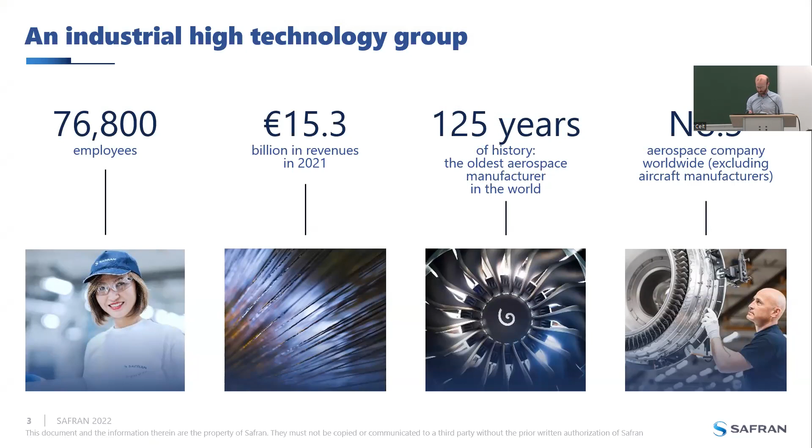In terms of presence in the world, we are present everywhere, but particularly in France, where we have half of our employees. We are also in Europe, Asia, Africa, and America. We are everywhere in the world.

In terms of research, Safran spends about 10% of revenue approximately, and in this R&D part, 75% is for environmental impact of aircraft. We have about 12,000 people working only on R&D in Safran.

We are present in all aspects of aeronautics, in propulsion, particularly in landing systems, and for today, more interesting is electrical systems. We also have activity in space, particularly for propulsion of satellites and space optics, and in defense, particularly in navigation and guidance and optronics. These are the two big specialties of Safran.

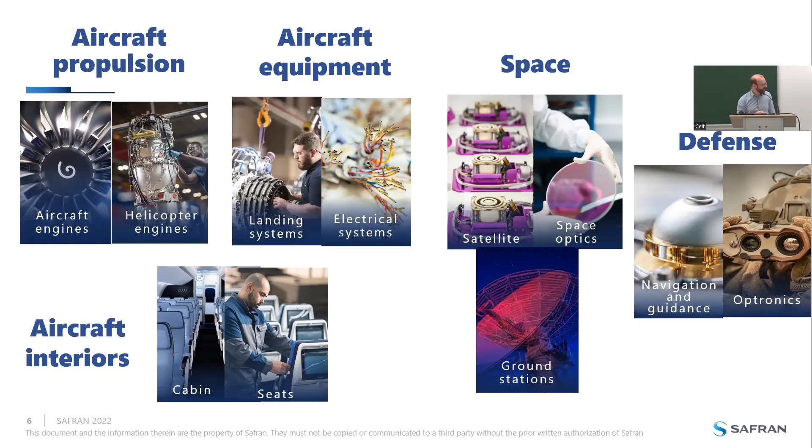Inside Safran, we have different societies. We are in Safran Electronic and Defense, which has 9,000 employees. We have different specialties inside Safran Electronics and Defense — electronics and defense, of course. 50% of our activity is for military projects and 50% for civil aircraft, particularly for all electronics in aircraft.

I work on the service for the actuator. In terms of actuators, we produce different kinds. We have some actuators for the cabin, for the seat, particularly for the business seats inside of aircraft. You also have the ETRAS, which is for braking the aircraft with a thrust reverser.

You have a secondary flight control — for example the horizontal stabilizer actuator, THSA. Also, we have some actuators for the primary control, which is more of a prototype for the moment, not yet a reality inside of aircraft. And then we have many actuators inside of the cockpit, particularly throttles, but also stick units.

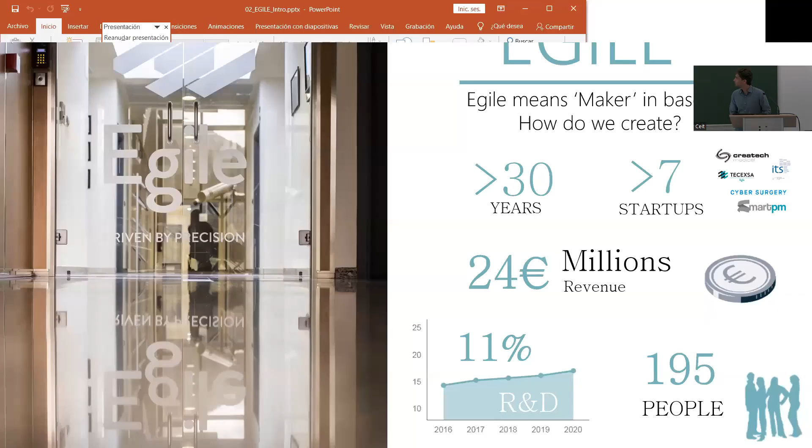We are an industrial and technological group which provides special services and products in the field of high precision mechanics. We are located in the north of Spain, between San Sebastian and Bilbao.

Some numbers about the company: we have more than 30 years of experience in the field of mechanical components, and there have been more than 7 startups born from Egile Mechanics R&D projects. We had revenue in 2021 of almost 24 million, and we invest about 11% in R&D projects. We are almost 200 people, and just as a curiosity, Egile in the local Basque language means maker, or who makes.

We are divided into 4 different divisions. Two of them are related to the aeronautical sector. The first one is Egile Aerotransmission System, which is a manufacturer of different components for airplanes and helicopters. Also in the aeronautical sector is Egile Aero Engines, which is specialized in the manufacturing of different components for airplane engines.

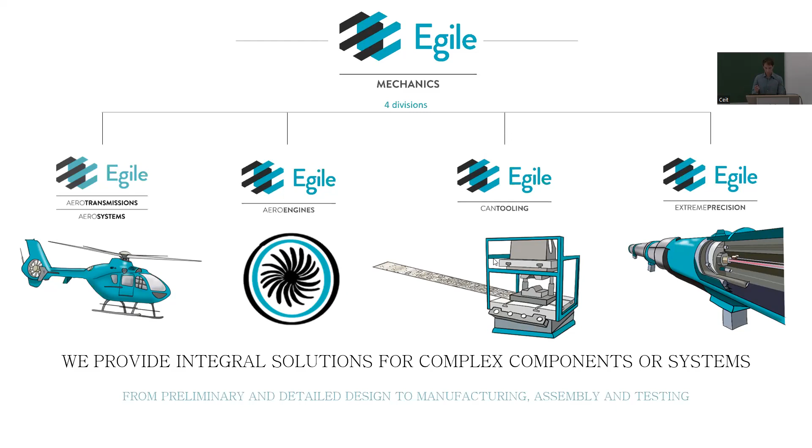Just a little bit of history. As I told you, we started 30 years ago manufacturing components for the SPPS project. We started with small batches, spare parts and prototypes. And over the years we gained access to new platforms and new systems.

So currently we are manufacturers of many components involved mainly in Safran helicopter engines, but also we work for Airbus and other big players of the industry. Currently, we are working on diversification, internationalization, and vertical integration of the processes needed for the manufacturing of our products.

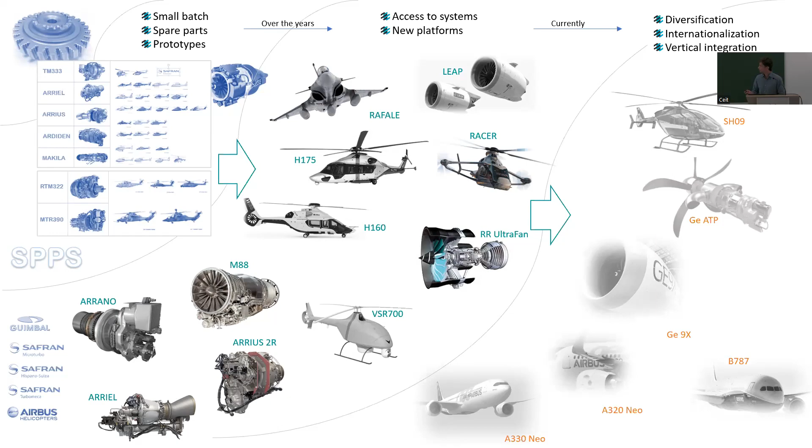As you see, we are involved in many programs for airplanes from Airbus and Boeing. And here are just some examples of those boxes that we provide with all the components for the landing gear.

The division of Egile Aero Engines is focused on the manufacturing of NGVs, nozzle guide vanes, and airfoils. However, we also have some projects where we manufacture other components of the engines, such as main shaft, transmission components, lubrication system components, and so on. So also in this area, our parts are located in many plane and helicopter programs.

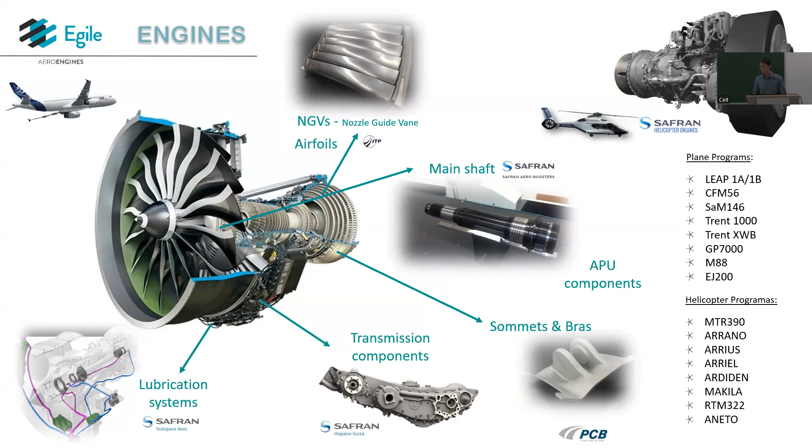As I told, one of the lines we are focusing on right now is vertical integration in order to provide our components with the whole system done in-house. So we already have the NADCAP certification for carburizing and nitriding, and for sure also for other heat treatments such as quenching, tempering, and so on.

In order to provide the whole process in-house, we have also integrated special quality processes needed for the certification of quality of the components, such as magnetic particle inspection, liquid penetrant testing, Barkhausen noise, and so on. We have a new facility in Itziar, where there are more than 6,000 square meters of open workshop.

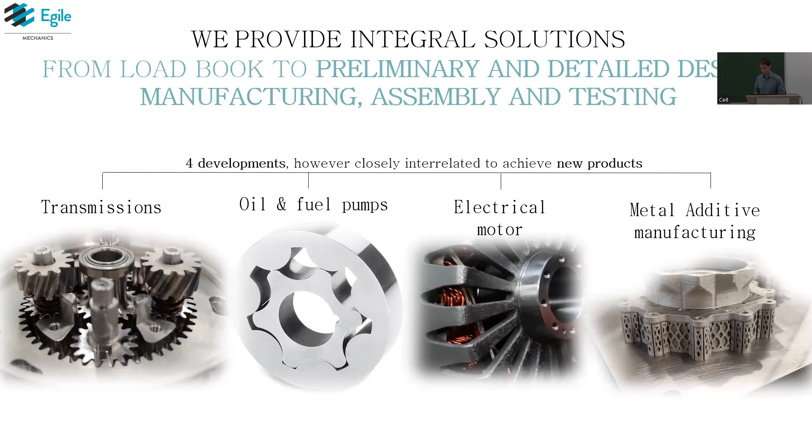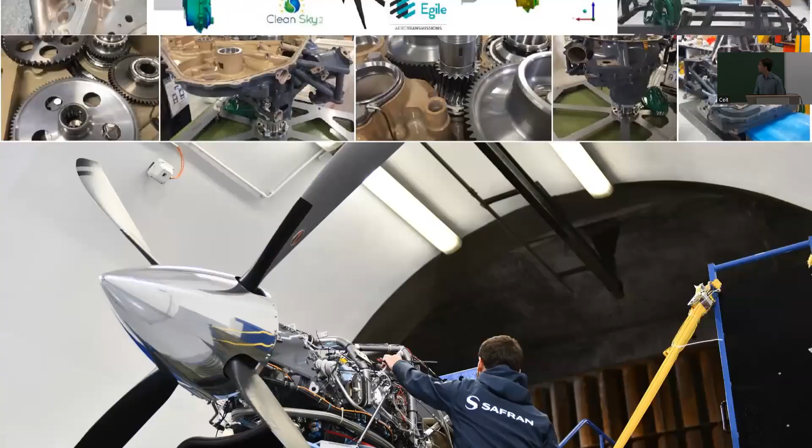Just to finish, some slides with finished projects. This is an example of a Clean Sky 2 project that we performed with the collaboration of Safran Helicopter Engines and Safran Transmission Systems, where we co-designed with them the gearbox of the TEC-TP project. We also manufactured the components and the assembly, and they have been testing them in the facilities in Tarnos.

Here's another example, also for Safran, where we designed a very high speed double epicyclic gearbox. We did the calculation, design, and the assembly, and it has been testing in 2021.

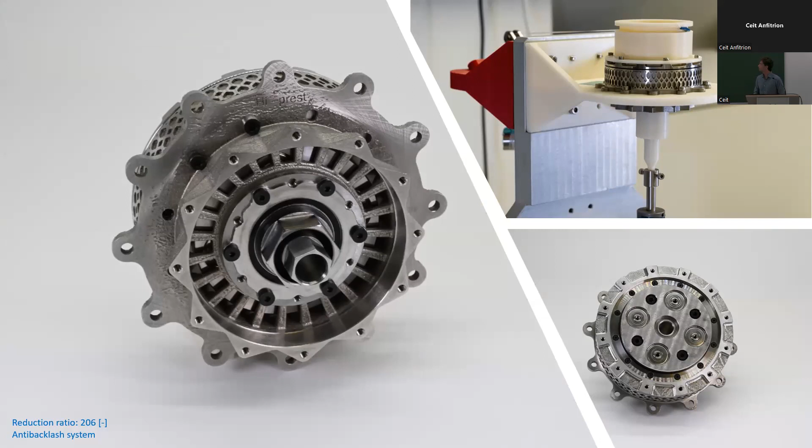achieve the specification of the client. And, as I said, we are also providing different solutions for the lubrication of airplanes.

We are designers of gerotors and gear pumps. It's another example where additive manufacturing might introduce some benefits, at least at this moment, for some prototypes that we have been performing during this year.

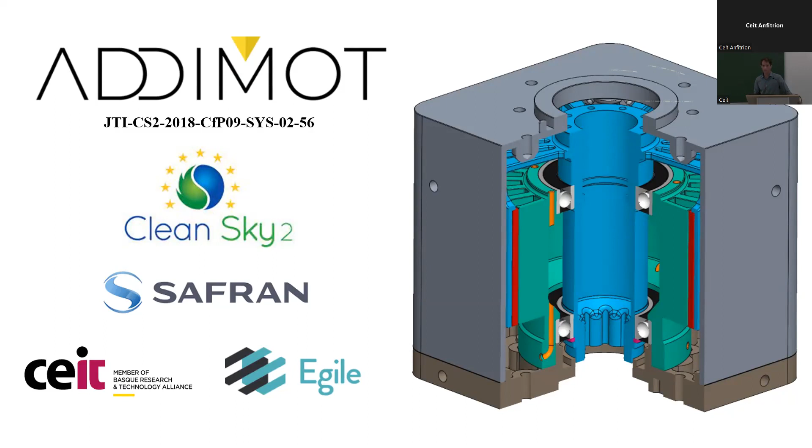And that's all. Now I'm going to let my colleagues start with the aim of this workshop, which is the Addimot project. That was a Clean Sky 2 project with Safran as topic leader, and we worked with Ceit in the development of this electrical motor.

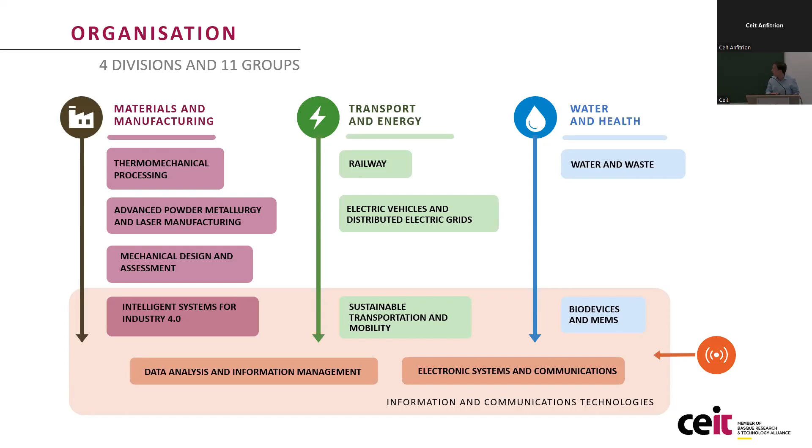Finally, talking about the aeronautics sector, we have been very active in recent years in several activities: modeling and characterization of materials and manufacturing processes, with huge experience of nearly 40 years at the center, with some clients.

And finally, just some clients that we have in this sector. We work with major actors: ITP Aero, Airbus, Leonardo, and also Safran, and other clients we work with in this sector, of course, with our colleagues of Egile Mechanics.

Okay, and that's my brief presentation of Ceit and our work in the aeronautics sector. Now I'm giving the floor again to Blaise, just to give us the context and the objectives of this Addimot project. And now we begin with the technical session. Okay, Blaise, please.

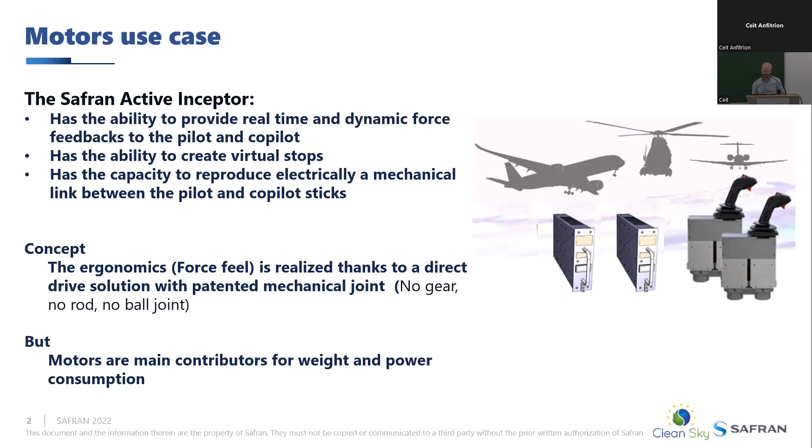It's for that reason we have chosen this motor for the Addimot project. If I focus on the motor, the functional envelope is 100 by 100 by 100 millimeters. If it's smaller, it's better, but that's the space we have for the moment.

The level of torque is around 10 Newton meters, and it never does one full turn, just 70 by 70 degrees.

The most important thing for this motor is also the quality of the torque, because you have a sensation, and the sensor of the human hand is very sensitive. For this reason we want to have no cogging torque in this motor, or very little. The ripples need to be minimized, and the friction also needs to be very small.

Also, the last aspect is consumption, because you are in an aircraft, and the level of consumption needs to be very low. Imagine the motor has no movement for a large part of the time, so it has no power—you only have losses inside this motor.

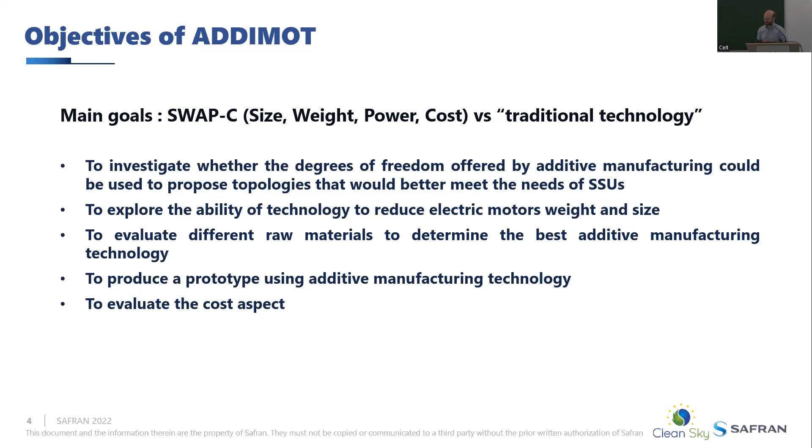Thank you very much, Blaise, for giving us the context and the objectives of the Addimot project. It is the use of additive manufacturing for electric motor components. We're going to begin with the production of the powder needed, the raw material for magnetic and structural components. José Manuel Martín and Miren Aristizabal are going to introduce this aspect, not only the Addimot results, but also an overview about magnetic materials for additive manufacturing.

Good morning, everyone. My name is José Manuel Martín García, and I will do this presentation with my colleague Miren Aristizabal. I will do a general introduction about additive manufacturing of magnetic materials, and in particular the process of selection of the materials for this project. Later, Miren will present the technical results in more detail.

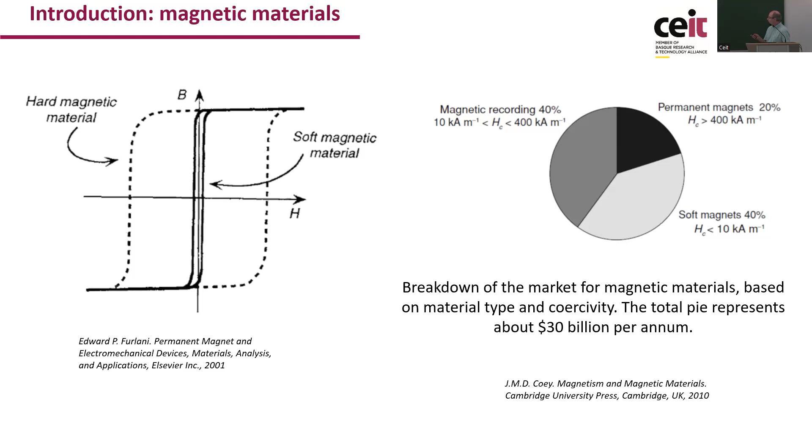Two other important properties of hard magnetic materials are the coercivity, this point here, the maximum H field that the material is able to withstand in operation, and secondly the remanence, the B field at this point, which is related to the maximum torque that the motor can deliver.

In the case of soft magnetic materials, the main characteristic they must exhibit in application is that they are easy to magnetize and demagnetize, consuming very low energy. To do so, as mentioned before, the curve must be very narrow, meaning they must have a very low coercivity. If possible, the permeability must be as high as possible, because this is related to the velocity at which the material can respond during magnetization and demagnetization.

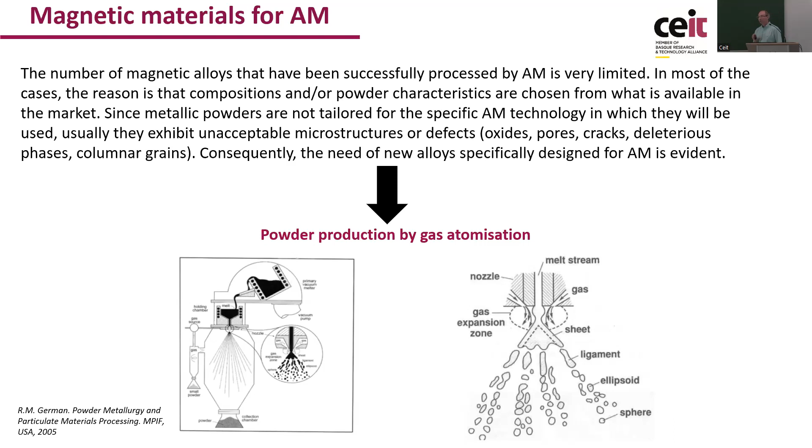At Ceit, we have two facilities to produce gas atomized powder. The first is a small atomizer, large scale, where we are able to produce 3 kilograms of powder per experiment. We also have a big atomizer where we can produce 200 kilograms of powder per experiment.

In the process, basically what we do is charge the raw materials into an induction melting furnace. Here we melt the materials and they get alloyed with the different alloying elements. When the melt is homogeneous, we lift up the rod, called the stopper rod, and the metal is driven into the atomization chamber.

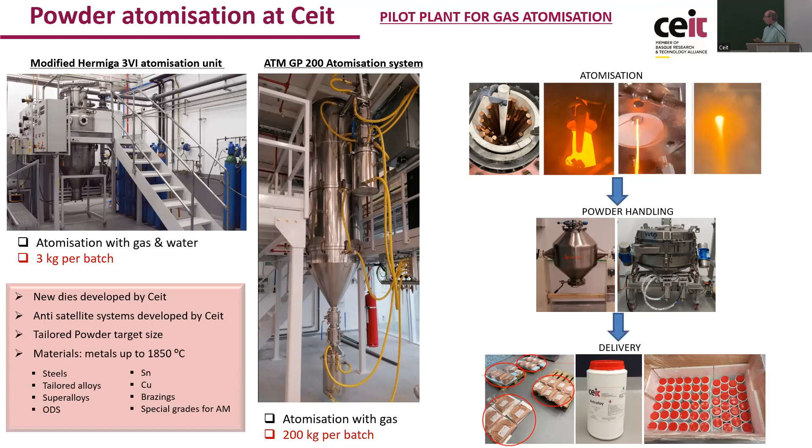When the metal arrives at the atomization chamber, we turn on a supersonic gas flow and impinge this metal flow, breaking it into particles. That's how we produce the powder. Later, the powder can be mixed with other additives using mixers, or sieved to separate the size fraction of interest, like in this project. Finally, the powder is packed to transfer to further processing.

Regarding the hard magnetic materials, the material of choice was neodymium iron boron. We were able to atomize this material to produce powder, but finally it was discarded for processing by additive manufacturing.

There are two reasons for that. The first one is the microstructure of the powder material. If you process by additive manufacturing, you melt this powder and it solidifies, so the microstructure is going to be different, but it will exhibit some main characteristics that are equivalent. There is always some residual alpha iron, which is a soft magnetic phase, and this causes the coercivity of the material to be narrow. Probably this could be corrected by applying an annealing treatment after additive manufacturing processing.

The second problem is that the powder is isotropic, and the selective laser melting magnets produced from it will also be isotropic. That means the maximum remanence we can achieve is about 0.5 to 0.6 Tesla, which compared with an anisotropic sintered magnet, with remanence of 1.3 to 1.4 Tesla, is quite low. If the remanence is very low, you have to make your motor bigger, which was not possible in this case.

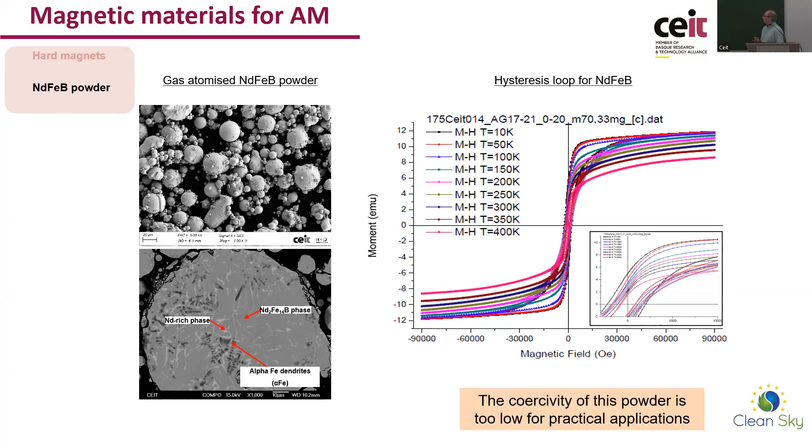So finally, we have not made a magnet by additive manufacturing in this project, and the magnets used are anisotropic sintered magnets that have been bought. Regarding the soft magnetic material, we have considered three possibilities: supermalloy, permandur, and an iron silicon alloy.

Supermalloy is an alloy with very, very low coercivity. It's the material with the highest permeability, but the point is that it has a saturation magnetization that is quite low, about 0.5 Tesla, which again means you have to make your motor design bigger. So it was discarded for this reason.

Iron silicon is quite convenient because it's a cheap material. It has a saturation magnetization around 1.7 Tesla, which is high enough, and the coercivity is also quite low. We did some builds with iron silicon, but the silicon content is quite high, which reduces the ductility of the material. During selective laser melting, there are quite significant thermal stresses, and the material was brittle - we could not easily avoid the formation of cracks during deposition. So finally it was discarded as well.

Finally, the material we worked with is permandur. Its main characteristic is that the saturation magnetization is very high, about 2.4 Tesla, which allows you to minimize and reduce the size of the motor. So it was a good choice. The coercivity is also a little bit high compared with the other materials, but this is especially important when the frequency of the motor's operation is high, and I think this was not the case. So let's say the hysteresis loss was acceptable in this project.

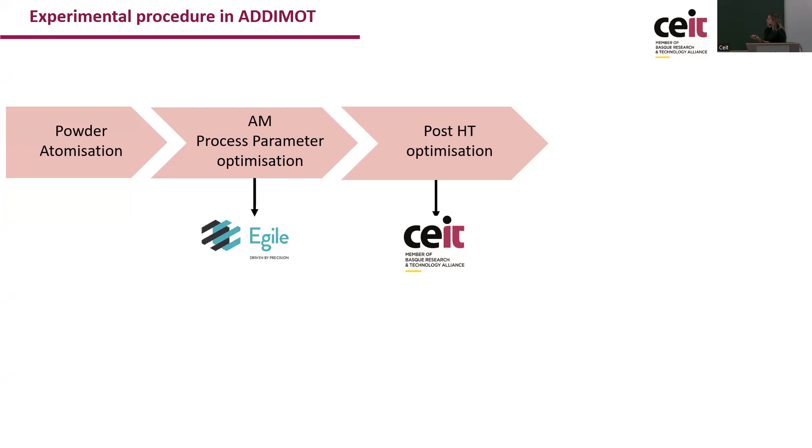Okay, so as Jose Manuel said, we finally chose this soft magnetic material, permandur. With this material at Egile Mechanics, what they did was a process parameter optimization - this talk will be given later by Egile Mechanics. Once we obtained the material with proper characteristics, what we did at Ceit was a post-heat treatment optimization. The experimental work we performed at Ceit involved applying several heat treatments, and in order to choose the best one, we related which microstructure we were obtaining to how this microstructure related to magnetic properties and mechanical properties.

Talking about permandur material, the composition is iron, cobalt, and 2% vanadium. We can follow the typical binary phase diagram that you can observe on the screen.

The studied conditions were first the laser powder bed fusion, or as-LPBF material, which is melted by laser and then rapidly cooled. The other conditions were after heat treatment, both after HIP (hot isostatic pressing) and after conventional heat treatment. All the heat treatments were done in this disordered alpha iron region, and the difference was the different cooling rates and holding times.

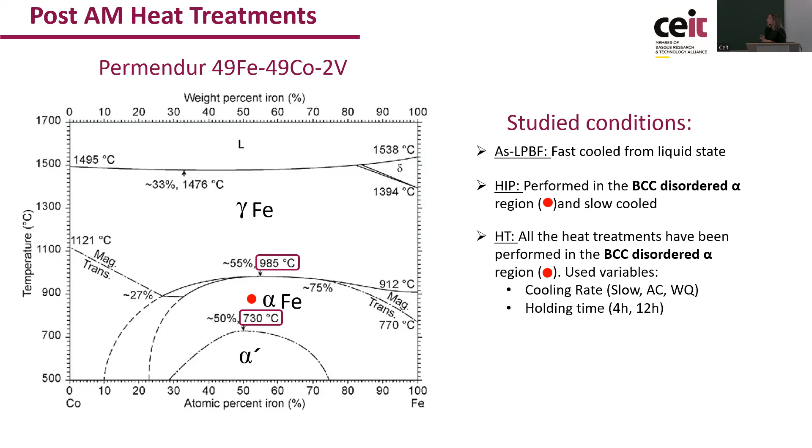Starting from the base material, the as-AM or as-laser powder bed fusion material, this has very fine grains related to the very fast cooling rate during the process. What we observe in X-ray diffraction experiments, which I'll show later, is that this phase was reached in a disordered alpha phase, the one here in this region. This phase has good mechanical properties, but the problem is that it has very poor magnetic properties.

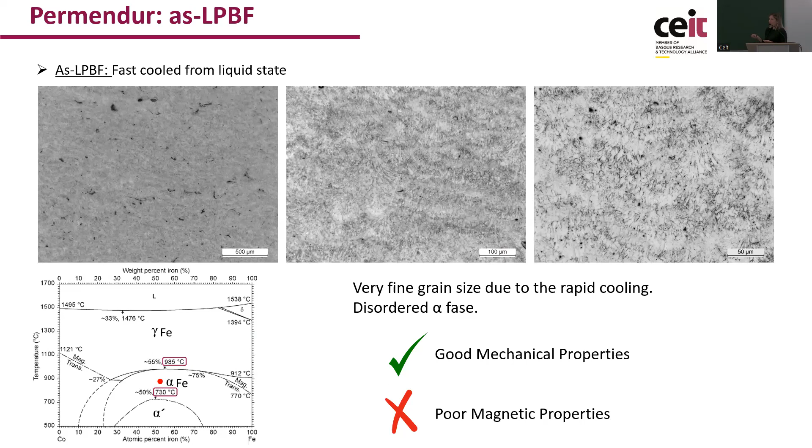As this material is supposed to be used for magnetic applications, we needed to change it. For that, the heat treatments are very useful. The standard heat treatment considers making a treatment at these temperatures with a holding time and then slowly cooling.

So when changing from disorder to order, what we obtain is very good magnetic properties, which is what we were looking for. But on the contrary, we again lose the mechanical properties, and the material becomes very brittle and difficult to handle.

Another thing I wanted to say is that both in hot isostatic pressing and conventional heat treatment, if we do the same thermal cycle with slow cooling, the resulting microstructure and properties are the same. So from now on, we focused just on conventional heat treatments, also because the material from SLM was already quite dense, so there was no need to close porosity by hot isostatic pressing.

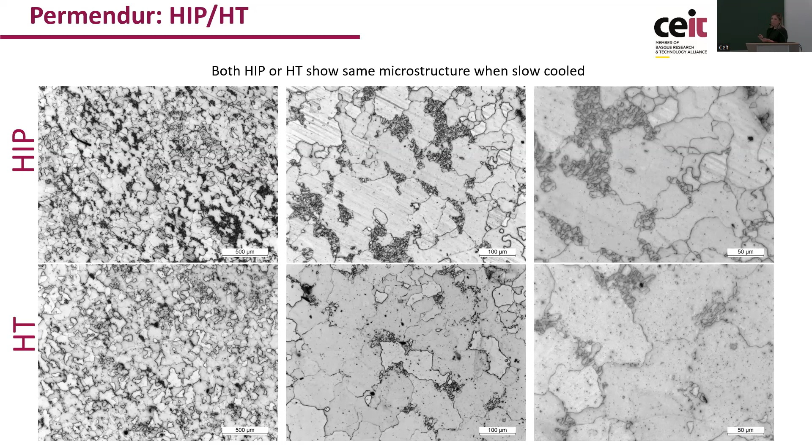The objective was to try to achieve these magnetic properties without losing all the mechanical properties. So the study we did was to try to change the cooling rate and see how the microstructure was developing, and how this was helping to increase or reduce the properties.

There were three cooling rates: the slow one that we already saw with the big alpha prime grains, then one intermediate called air cooling, and the fast water quench cooling rate.

In the case of the water quench cooling rate, again we observe a lot of small grains related to alpha grains. And again, as in the material coming from AM, we have good mechanical properties, but again the magnetic properties were low. So it's clear that if we increase one property, the other decreases.

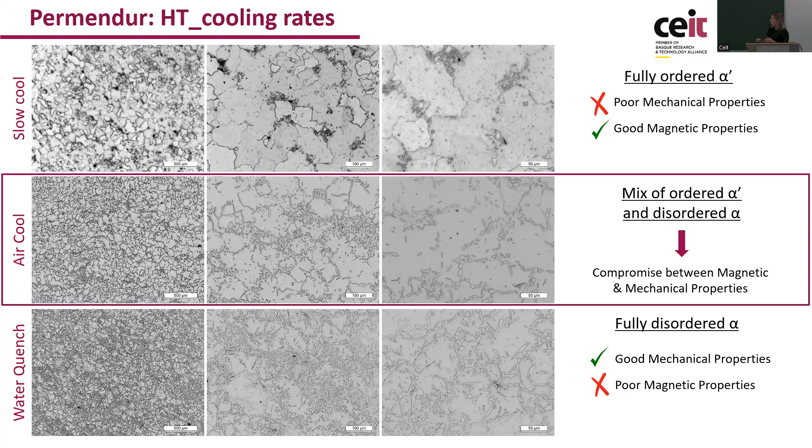So finally, what we saw is that we have to achieve a compromise with an intermediate cooling rate, which gives us a microstructure with a mixed alpha prime phase and alpha phase.

In addition, we did another study in parallel where we were changing the holding times. Here, what we wanted to obtain was whether increasing the size of the alpha grains and reducing the amount of grain boundaries would also increase the magnetic properties without reducing the mechanical properties. Although the difference isn't very large, it works, but the intermediate cooling rate is still needed.

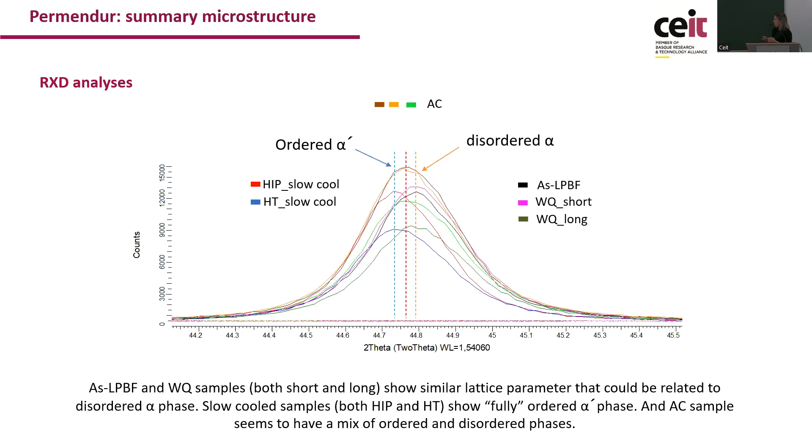So they have very low coercivity, but high permeability and high magnetization saturation. And these were related with the ones slow cooled, so heat treated and then slow cooled. And the worst soft magnetic properties were for the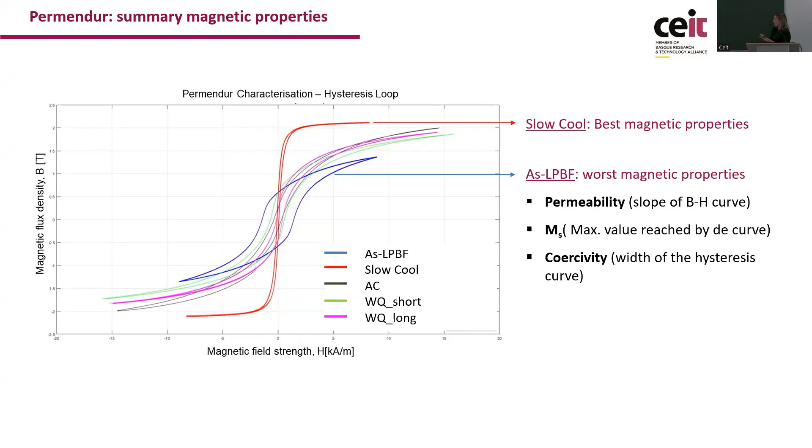AM microstructure, and in the middle, as we say, the ones that has been heat treated with different cooling rates. So conclusion, if we have a material that has been fast cooled from AM or after heat treatment, we are going to obtain a material that has a disordered alpha microstructure, which has very good mechanical properties, both in strength and in elongation. As a sample, you can see here a fracture surface of a very ductile material, but that

has very poor soft magnetic properties. On the other side, if we do a very slow cooling rate, we have a material that has ordered alpha prime microstructure with very good soft magnetic properties, but we lose completely the mechanical properties.

So for the Addimot project, what we needed and was finally the optimized conditions were the ones that were intermediately cooled, so with air cooling, where we obtained a mixture of microstructure and gave us enough magnetic properties for the application and also enough mechanical properties for machining and also for the application itself.

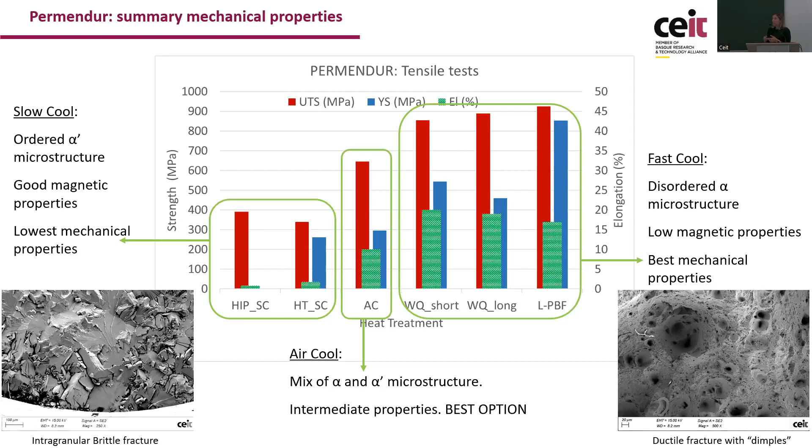So, as conclusion, as Jose Manuel said, the gas atomization process is a good alternative to manufacture soft magnetic and hard magnetic materials for additive manufacturing, because we have this feasibility of tuning the powders for the application.

And also, it's important to know that there is a high interest in magnetic materials for AM, but that still in the literature, there are not a lot of successful attempts. So there is a need for researching these materials in AM.

In our case, in the Addimot project, we have been able to manufacture a soft magnetic material and then process it by SLM or laser powder bed fusion with optimized parameters. Then thanks to the heat treatment optimization, we have been able to tune the microstructure of this material, achieving both magnetic and mechanical properties. So the final component was able to be applied with even structural properties. And thus we can say that this project has been successful in terms of this material optimization.

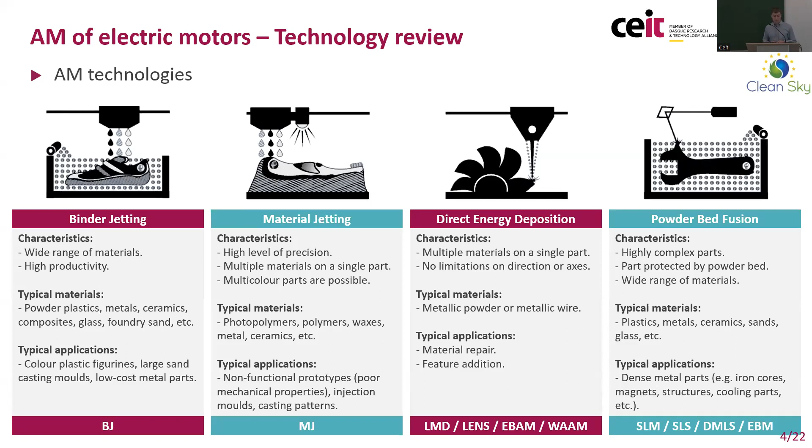joining it by either using a binder or sintering those powders, or either fusing them by applying some energy in terms of laser, heat, pressure, electron flow, and so on.

A different or particular case that's quite different is the cold spray technique. Instead of trying to bind powders by applying energy into them, what it does is just spray the material at high speed onto a surface, obtaining a layer of material. So it's more of a coating process rather than a manufacturing process itself, but it's quite interesting and has been successfully applied to the manufacturing of permanent magnet materials.

Regarding the additive manufacturing of electrical machines, the most common processes being investigated nowadays are binder jetting, material extrusion techniques such as fused deposition modeling, or powder bed fusion techniques such as selective laser sintering or selective laser melting.

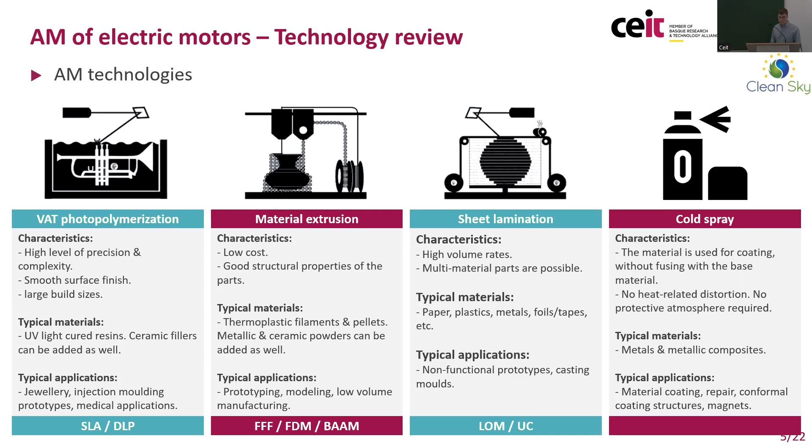So regarding project Addimot, the technique of selective laser melting was chosen for the manufacturing of the different motor parts because it's quite suitable in order to obtain dense metal parts with very good precision. As my coworkers have stated, selecting the appropriate material and processing parameters is important, but selecting the adequate manufacturing technique is quite important as well.

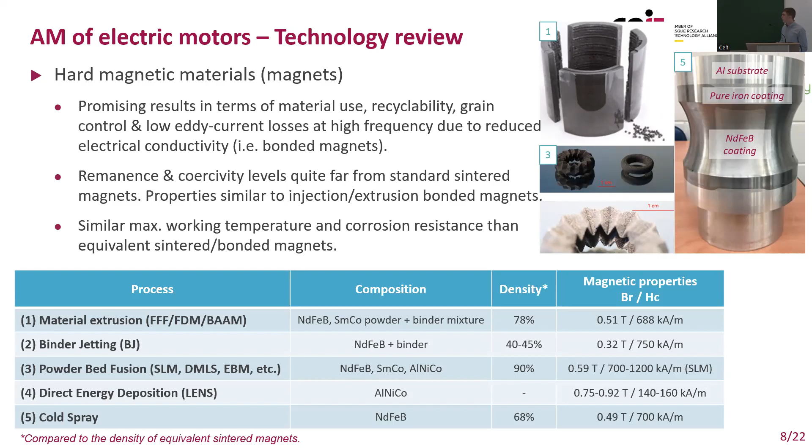The results are quite more interesting for the soft magnetic materials, as Miren has explained. In this case, material properties obtained, especially for powder bed fusion techniques, are quite good. Several examples of silicon iron, cobalt iron, or nickel iron materials can be found in the relevant literature.

Regarding the additive manufacturing of soft magnetic components, results for the moment are quite good. Quite a lot of research efforts are being made nowadays in order to reduce the eddy current losses in the solid materials.

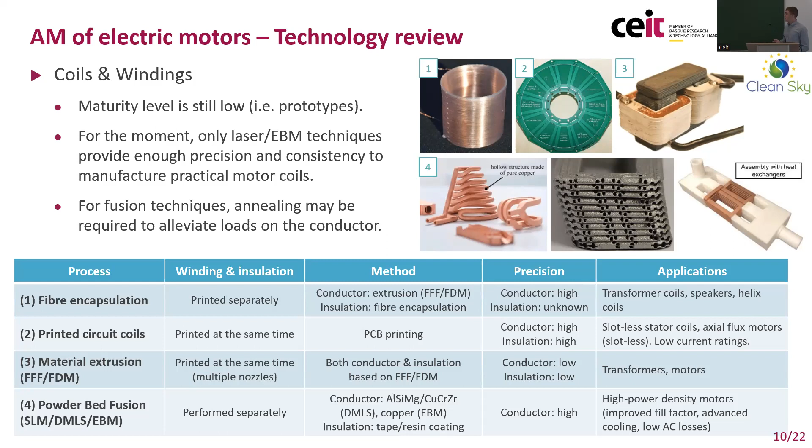Regarding insulators, additive manufacturing allows to quite easily process dense and porous ceramics, and according to some studies, they may help even reduce manufacturing time and cost.

So there are quite interesting prospects regarding the additive manufacturing of ceramic and insulator materials, but quite a few challenges remain regarding the resolution and precision of the components that can be achieved, especially regarding the microporosity of these components, as this directly affects the thermal conductivity of the ceramic parts, and also the partial discharge behavior.

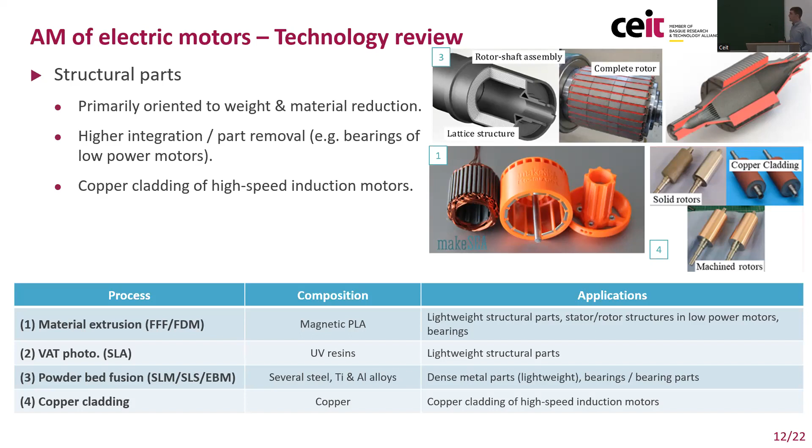Another quite interesting application of additive manufacturing is to have rotors of induction machines, solid rotors, made by cold spray technique, in which a copper layer is directly printed on the baseline rotor surface, therefore allowing very high speed for these motors.

Regarding the additive manufacturing of cooling systems of electrical machines, also a lot of work has been conducted. It has been used for producing heat exchangers, heat guides, cooling channels, manifolds, cooling jackets, heat pipes.

What additive manufacturing in these cases allows is to have quite complex parts, with reduced weight, and also with enhanced features that allow the thermal transfer from the motor parts to the outer surfaces.

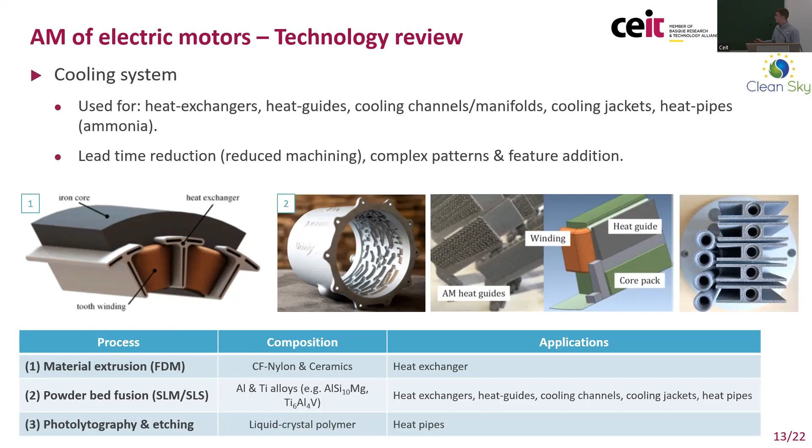Okay, and lastly, some developments have been made regarding the additive manufacturing of sensors. But most of the work, from our understanding, is being applied to the manufacturing of biomedical sensors. Some examples of sensors that are of interest in the sector of electrical machines or magnetic components are strain sensors, accelerometers, displacement sensors, force sensors, temperature sensors, and so on.

So now moving on to the additive manufacturing of the motor in the Addimot project. Well, the requirements of the applications have been already stated by Blaise, so I will not focus on that. In our case, based on the application and its requirements, the proposal of the project was to focus on the soft magnetic and the structural parts, even though, as Josema stated, some trials with permanent magnet powders were also made.

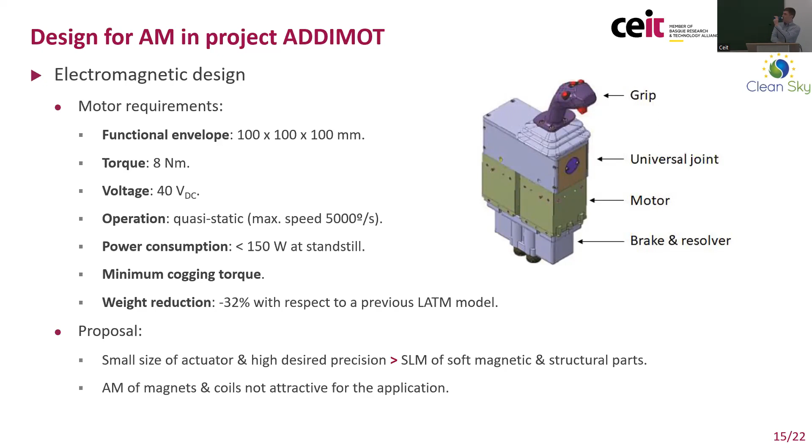So from the requirements, a first step in the design of the electrical and the electromagnetic parts was to evaluate different motor topologies, such as double rotor ones, both traditional and Halbach, axial flux machines, traditional radial flux ones, even some hybrid configurations of radial and axial flux machines were preliminary evaluated.

So based on the requirements and the different topologies, a trade-off analysis was made regarding torque capability for the maximum constraint of power stated by the specification, and also the weight of the materials. In this case, the best results were obtained for traditional radial flux configurations, both inner rotor and outer rotor ones. In the case of Project Addimot, after this preliminary evaluation, it was decided to opt for an outer radial flux configuration, as it allowed an easier industrialization of the manufacturing of the coils.

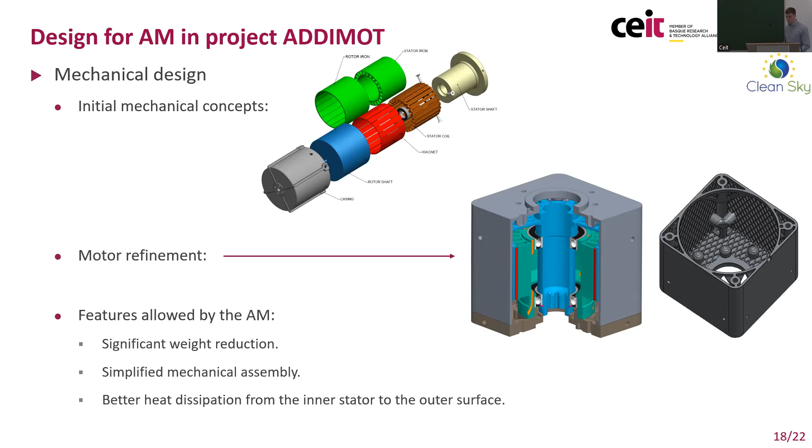Finally, regarding the comparison of the additively manufactured Addimot motor concept versus a traditionally manufactured one, a traditional concept with iron silicon lamination for the stator and ferromagnetic stainless steel for the rotor was designed, but based on the same mechanical concept as you can see here. Both designs were conceived to have the same power consumption and thermal behavior.

So what was obtained by additively manufacturing the Addimot motor concept compared to the traditional one, in this case, is 11% more length for the traditional concept and 23% more weight, for the same thermal behavior and power consumption.

In the case of cost, this was also analyzed based on a production of 48 units per year during 10 years, with the manual manufacturing of the windings and the manual insertion of the magnets, and it was found that the cost of the two designs was almost the same, with the traditionally manufactured motor being just 2% cheaper than the additively manufactured one.

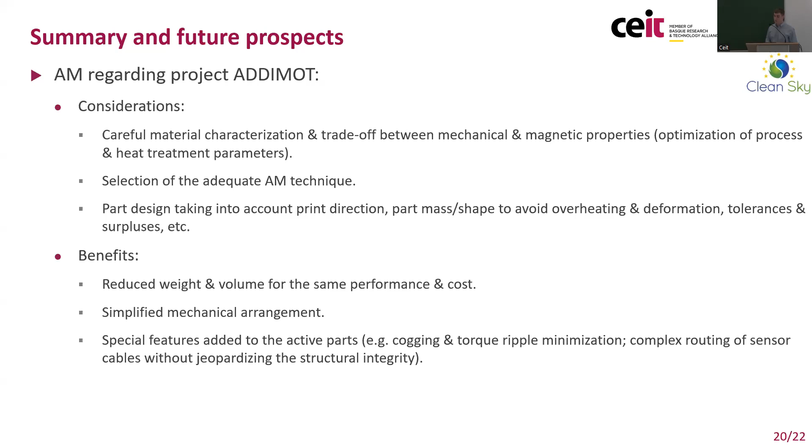So the benefits in this case of using additive manufacturing have been reducing the weight or the volume for the same performance and cost compared to a traditionally manufactured option, having a quite simplified mechanical arrangement, and also adding some special features in order to optimize the cogging torque and torque ripple behavior.

Regarding future prospects of additive manufacturing of electrical machines, it must be said that even though additive manufacturing is fast evolving, the manufacturing of electrical machines via additive manufacturing is quite in its early phases of development, with very few examples of machines being fully manufactured in additive terms.

But there are quite some promising perspectives in terms of having complex 3D multifunctional parts that have electromagnetic, thermal, and structural behavior, such as in the case of the Addimot project.

Also, in terms of having tuned material composition properties by controlling the grain size and grain orientation, and therefore having anisotropic properties, to have freeform coils with very high fill factors, reduced end-windings, and direct cooling for high power density applications, and to have direct deposition of high temperature ceramic insulators on e-motor parts.

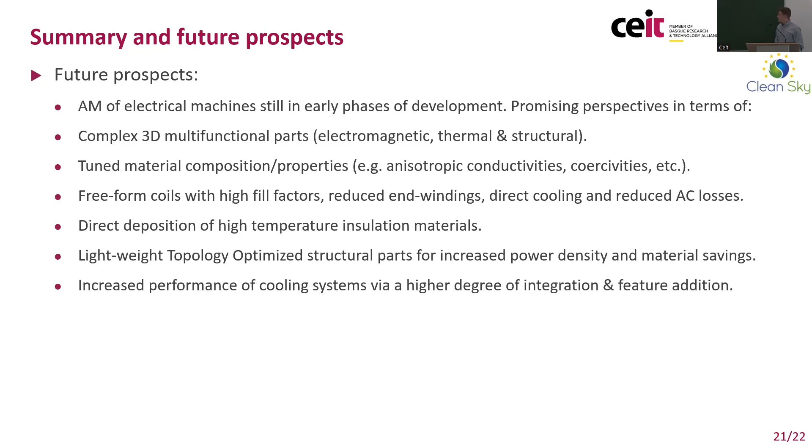This has been all. Thank you very much for your attention. And if you have any question, just feel free to ask.

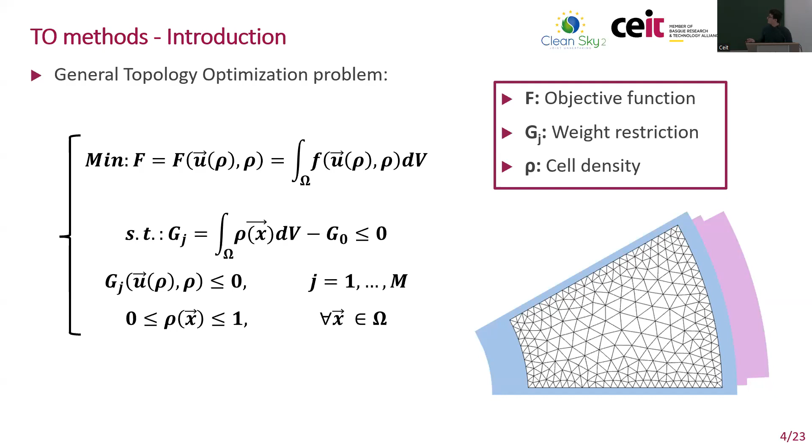Once we have presented topology optimization, I'm going to start with the main techniques used nowadays in topology optimization. The first one is the level set method. In this method, the main characteristic is that in each iteration it changes the mesh of the topology, so you can reach the final result with a very good border between air and iron. The density here is only 1 or 0, so there are no intermediate materials. However, the main drawback of this method is that by itself it's not capable of making void regions, air regions, and you have to add a bubble, like initial air bubbles, to achieve a good final solution.

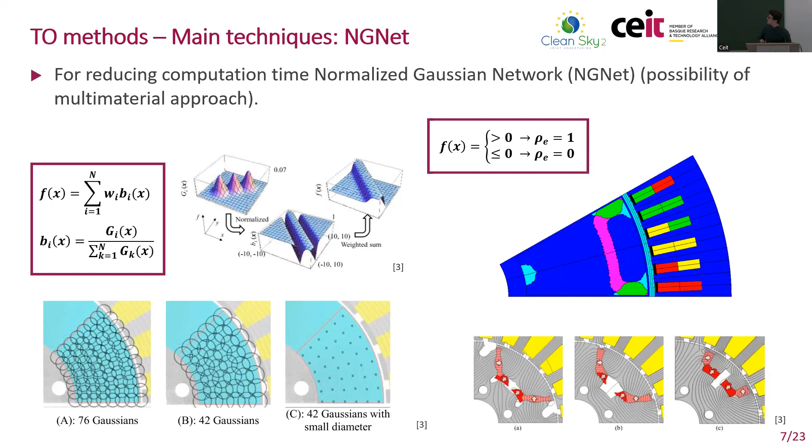Sorry for that, wait.

Sorry. Okay, so here, no.

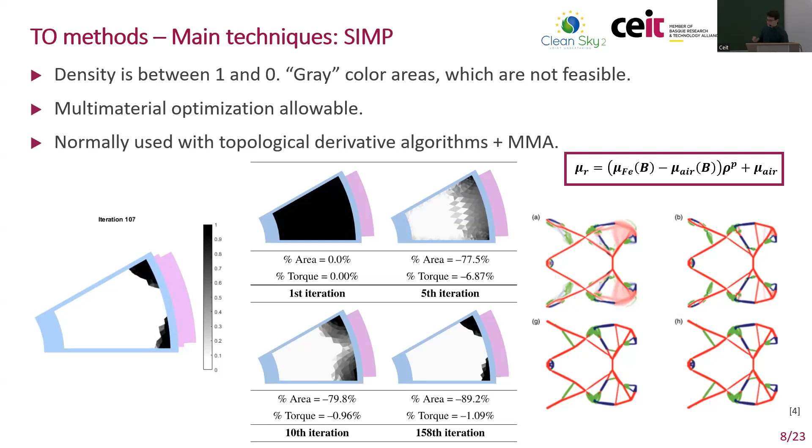It can also be optimized for multi-material, as we can see here, for a mechanic optimization. This final optimization is a shape optimization. It's not a topology optimization method, but as it is commercially available in Altair and used in some mechanical components, I like to show it. I will talk about it later.

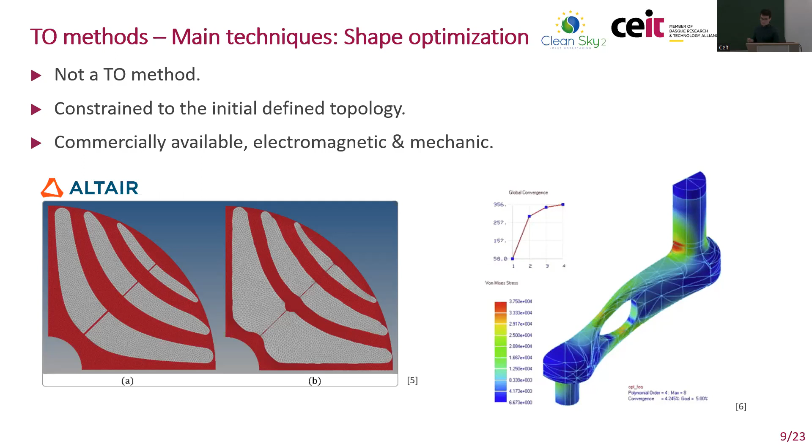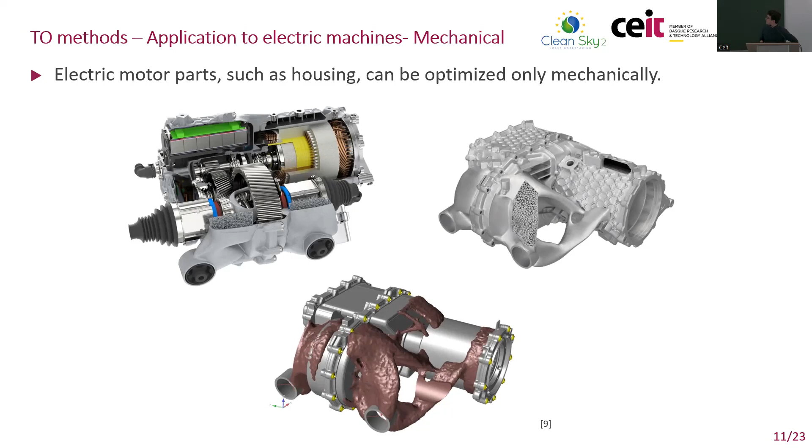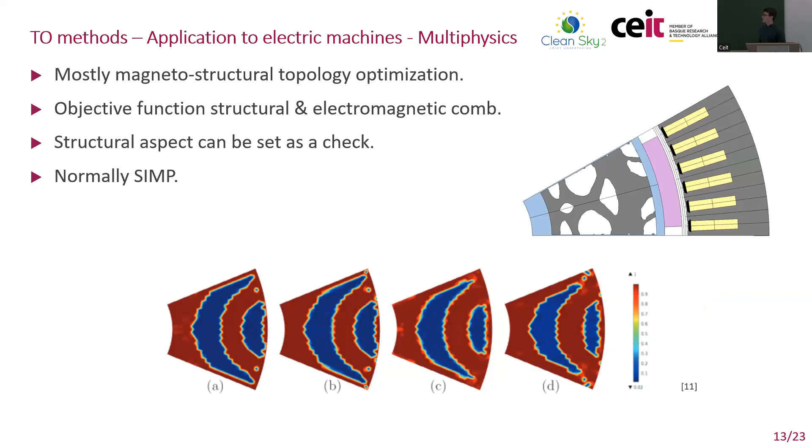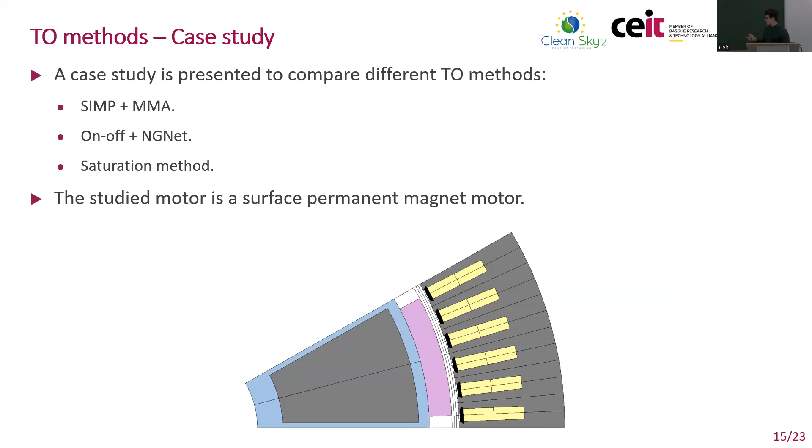Now I'd like to introduce a case study about a surface permanent magnet motor, which is going to be optimized with SIMP, on-off, and saturation methods, and compared. The saturation method is an in-house developed algorithm, an on-off method with an adaptive mesh, which simultaneously optimizes the rotor and the stator, and also performs a magnetostructural optimization.

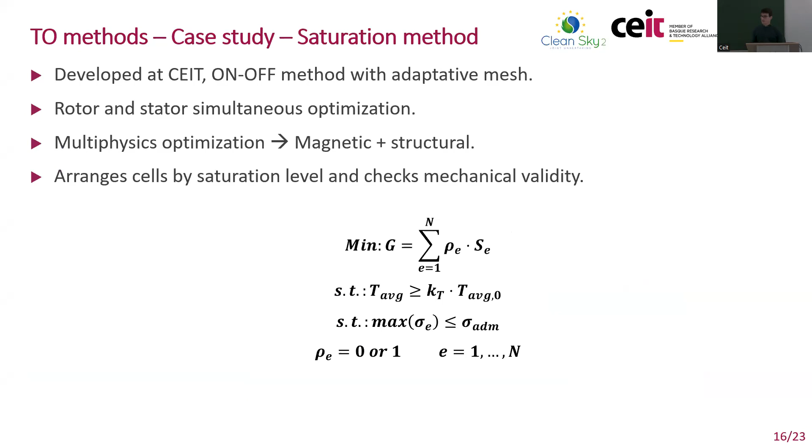Now I'm going to present how topology optimization has been used in the Addimot project.

Due to the small yokes after parametric optimization, electromagnetic topology optimization has not been done. But for the blue part here, which is the stator, mechanical topology optimization has been used, done in Permendur, with an actual mass of 1.61 kilograms.

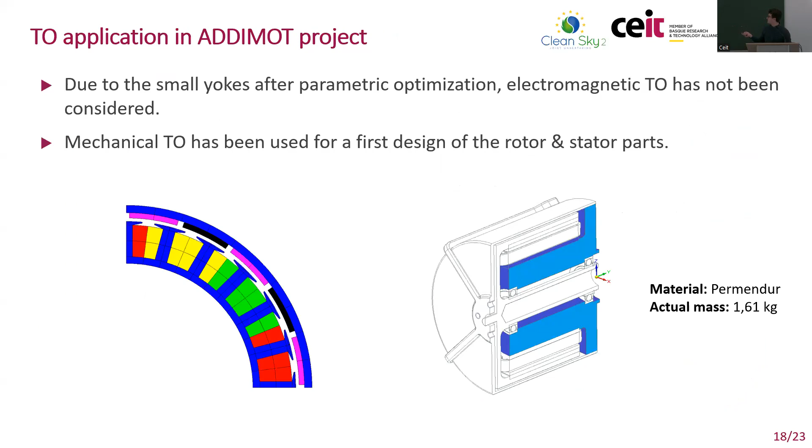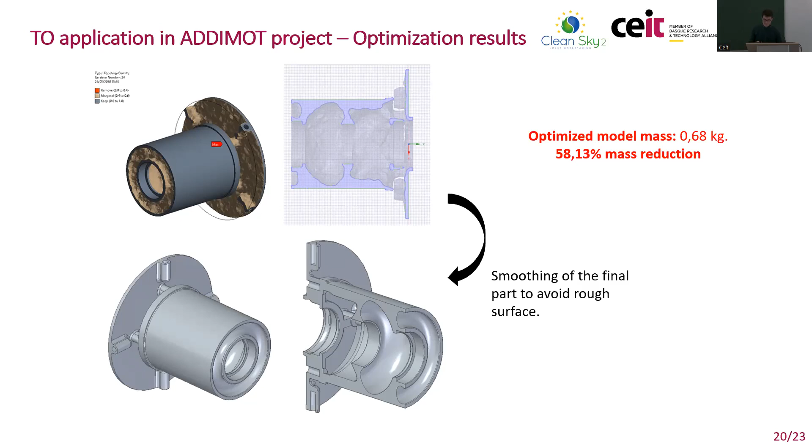So finally, an overview of topology optimization. Topology optimization is a growing optimization method which is able to maximize certain parameters of the motor and save material while manufacturing. However, as we have seen, the results of topology optimization are not easily manufacturable with traditional manufacturing, so it goes hand in hand with additive manufacturing of electrical machines.

Lastly, a final comment about electromagnetic topology optimization: it's not as developed as the mechanical one, but it has started to be studied, as in Altair and some commercial software I have shown. Thank you very much. I hope you have enjoyed the presentation. And if you have any questions...

I have a question from the audience online. You have said you have oriented your techniques with topology optimization techniques mainly on the removal of material. But is it possible to also add material in the process so that you ensure the direction of your convergence is right?

Yeah, for example, in the same method it can also add or remove material in the same way. In on-off, there are two kinds of methods. The bidirectional one does this: if it has taken material from a zone, it can put it back again. So it's possible to do that.

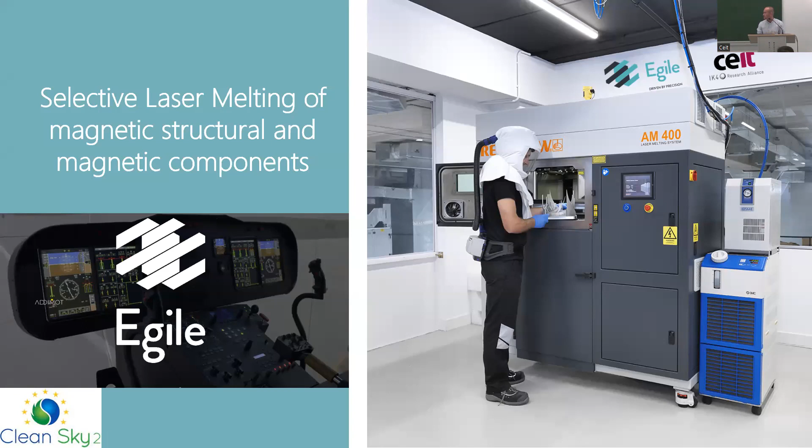Before starting this presentation on selective laser melting of structural and magnetic components, I would like to start with a brief introduction explaining how additive manufacturing, in this case selective laser melting, also called powder bed fusion, plays the role of a game changer, not only in aeronautics but in other sectors. Starting from design, we now see geometries designed with topological optimization or generative design. When speaking about additive manufacturing itself, it's time to leave behind the idea of materials difficult to machine and start talking about capabilities of manufacturing different materials with this technology.

When speaking about post-processing, related to the questions, we are now seeing many different technologies that weren't used before, for example chemical pickling, sandblasting, abrasive flow machining for inner holes, and other technologies such as electropolishing. And also, of course, laboratory and testing, so important in the field of aeronautics.

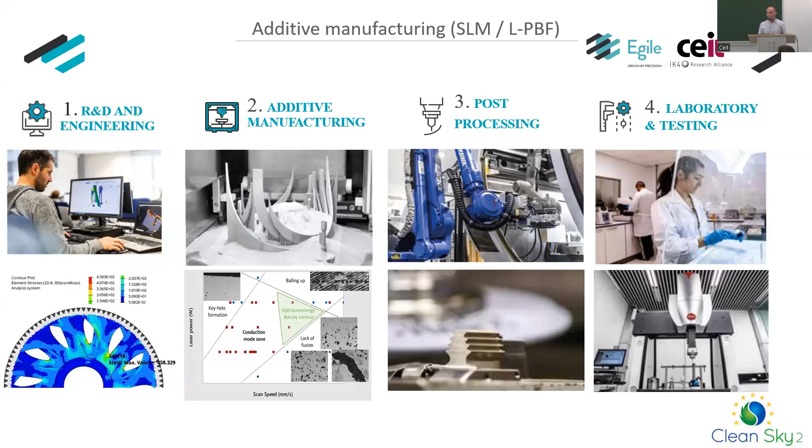So the way we position ourselves in Egile with additive manufacturing is working hand in hand with our clients in order to make the most of additive manufacturing, designing many different complex geometries.

When speaking about materials we've worked with: aluminum alloys, titanium alloys, nickel-based alloys such as Inconel 718, and we've got future research trends related to copper material. Talking about post-processing, we've got more than 30 years of experience machining microfused parts, and NADCAP certification for non-conventional machining and chemical milling.

And we've got an on-site laboratory for metallographic testing, a well-known process in aeronautics, also used to check the microstructure of additive manufacturing, and NADCAP certification for non-destructive testing.

So in order to put into context the Addimot project we've developed, we started with the design and simulation of this motor following the aspects the topic leader Safran has explained, and in parallel doing the material characterization. Once we developed good parameters for additive manufacturing by powder bed fusion technology, we started manufacturing the prototypes and the quality control I've explained.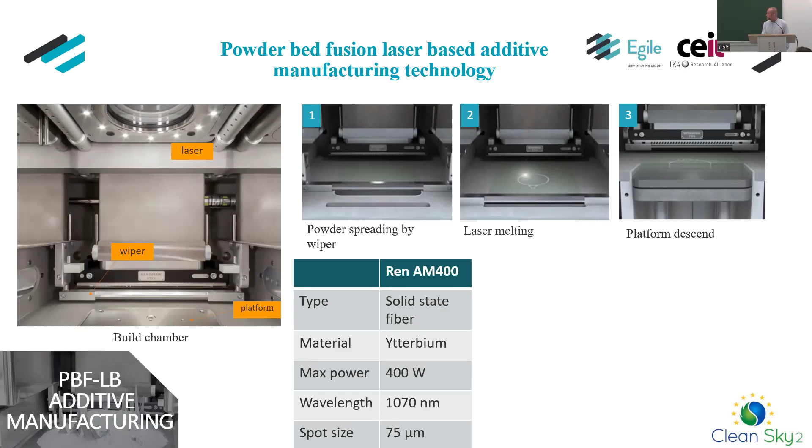In order to understand how we've developed the different parameters to check the laser melting parameters of this technology, I'd like to briefly explain how the laser works. The laser develops different scanning strategies in which it's in charge of exposing different spots.

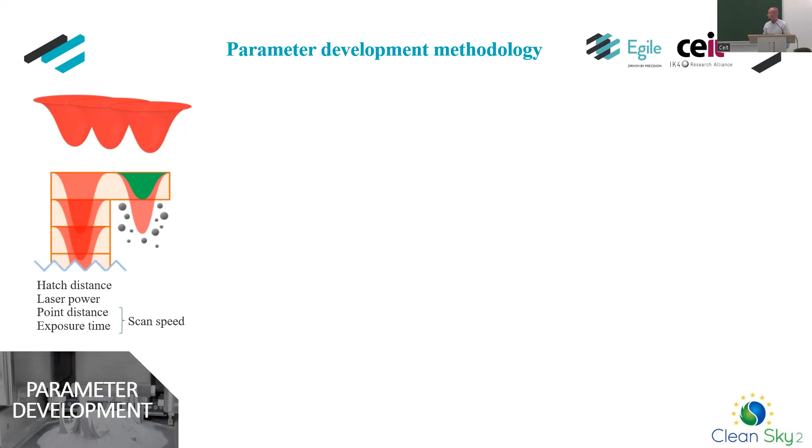To put an order of magnitude, between the different exposures we are talking of microns and microseconds. Once you understand more or less how this technology works, it's time to develop laser scanning parameters for this technology with a design of experiments. As you can see, some test tubes have been manufactured, some vertical and some diagonal.

After this, we've CT scanned them to check for cracks and micro cracks. And after that, we've done a metallographic test to check the microstructure and possibilities of porous sections. So once we've done all this with image treatment, we're able to quantify the density and the porosity of these test tubes.

The first soft magnetic material we started working with, as our colleagues from CEIT have explained, has been iron silicon, a very difficult material to additive manufacture. Four different iterations needed to be done in order to avoid cracks and micro cracks of these test tubes.

To understand how this works, when using high energy density levels you've got not very porous sections, but cracks and micro cracks have appeared on the CT scan and the metallographic test. When using very low energy density levels, we get no cracks, no micro cracks, but very porous zones not suitable for this application.

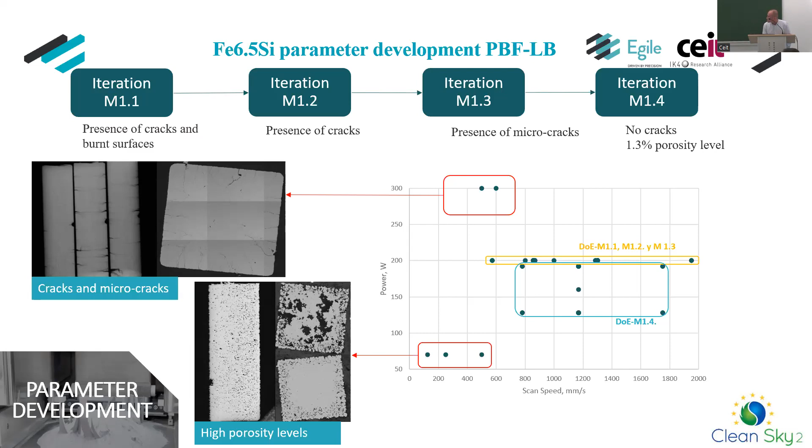The next material we worked with was Permendur, which only needed two iterations. In the first one, we already checked that there were no cracks or micro cracks, but we had some high porosity at the borders, so we had to do a design of experiments to improve these border parameters. The second iteration achieved density levels higher than 99%.

These were the energy density levels chosen for the Permendur. As shown before, when using low energy density levels, you get lack of fusion. And sometimes when using high energy density levels, you get these round pores, which means evaporation has occurred during the laser melting.

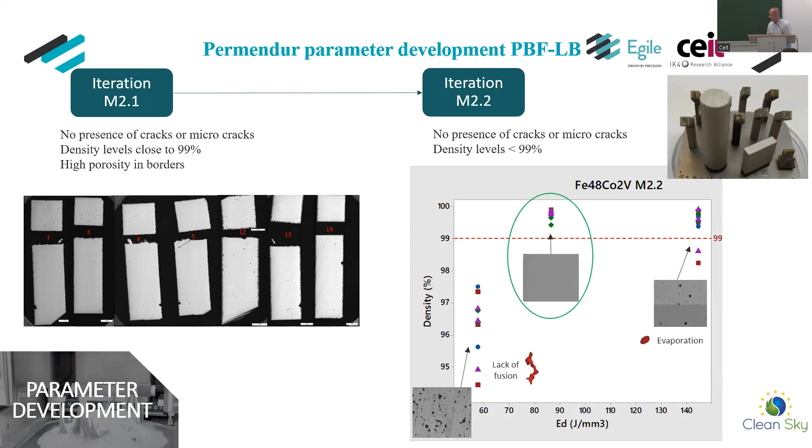Here you can see the manufacturing batch of soft magnetic materials of Permendur. In this case, both the rotor and stator have been manufactured in the same batch, and you can see some control height porosity bars that have been checked in CT scan.

After that, the heat treatment Miden has explained. Then it's time to remove the built parts and supports from the platform. A curiosity of this material when applying this heat treatment is that it becomes brittle.

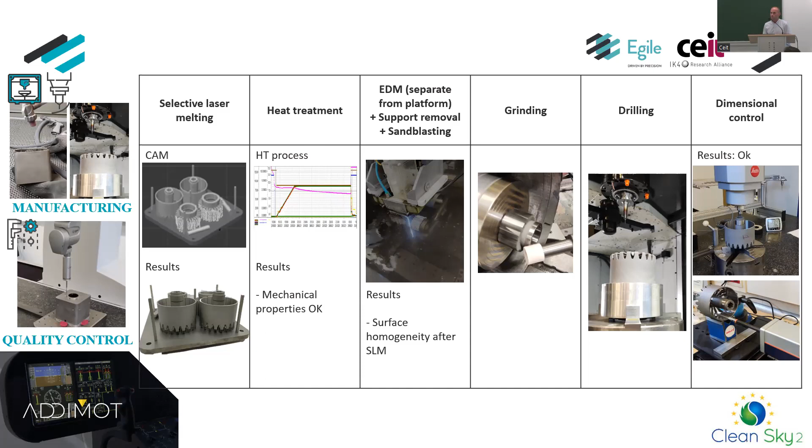That's why we've decided to take off these extra materials using grinding and also drilling. And afterward, the dimensional control test and CT scan in order to check that there are no cracks or micro cracks in the manufacturing of these components.

As you can see, also the casing, which has been topologically optimized. After that, heat treatment for stress relief and the machining, as mentioned.

Once we've got the active parts of the motor, the casing, and also the lid, it's time to assemble the component with the help of Lancor, in this case a company specialized in the manufacturing and assembling of electric motors.

After that, it's time to test our prototypes, which I think Miguel will explain afterward. So thank you for your attention. If you've got any questions, online or otherwise, I'll be pleased to answer.

Questions about surface finishing and post-processing parts.

Yes, in this case we've used grinding and machining in order. Everyone here probably already understands that additive manufacturing has its limitations on surface roughness, so when designing these components you need to give extra material to your additive manufacturing

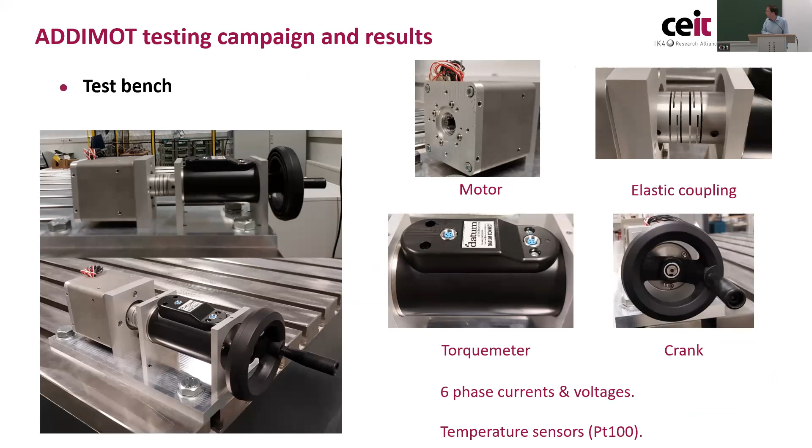We proceeded with the test, and of course the first problems arose - normal. The first two prototypes, everything was okay. The third prototype had some problems with the windings, probably because the requirements were not very good.

We tested the induced voltages of every prototype. Let's say... no, I'm sorry, we're having problems with the device.

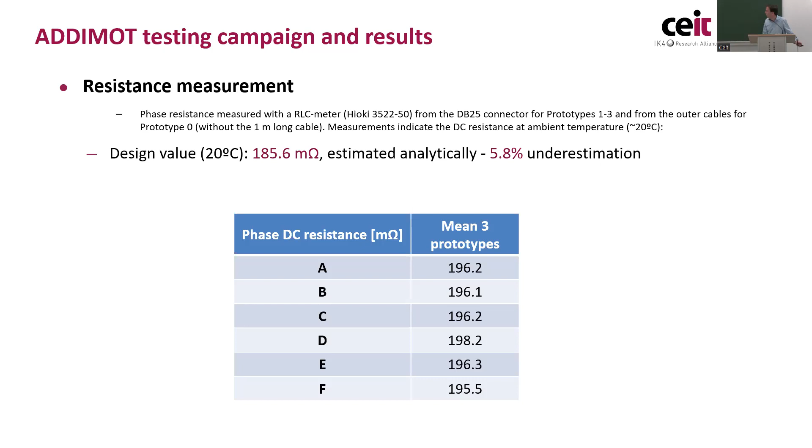Then we proceeded to normal tests, resistance measurements - quite good, estimated by the design. It's only a 5.8% underestimation of the resistance values of every phase. There's a 6-phase motor, then more importantly, the magnet flux linkage measurement.

The magnet flux linkage is key for the behavior of the motor, and the predicted value was 18.95 milliweber. The measured values were very close to it, practically the same - 1.5% overestimation of the magnetic flux linkage. So with this measurement we were more relaxed because the machine was quite okay.

Please. It doesn't work.

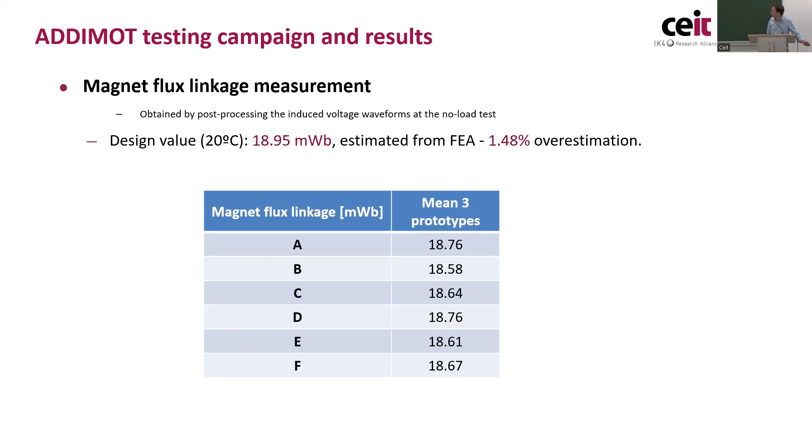A very simple torque versus current test. Unfortunately we haven't had the converter to drive the motor properly, so we proceeded with a DC current test and quasi-statically moved the rotor to measure the torque versus angle of the motor. We measured the mean value for the 3 prototypes of 8.06 Newton meter for the given current, which is a very good result compared with the estimation.

Okay, it's almost no discrepancy in this, so here the objective of the standstill torque was achieved.

Then we proceeded to the heating test at standstill also, providing maximum current for the 8 Newton meter during 2 minutes, which was the requirement from the topic manager. We verified that the temperatures were under the limits of the insulation system - in fact it's quite a cold motor, which is very good for the application.

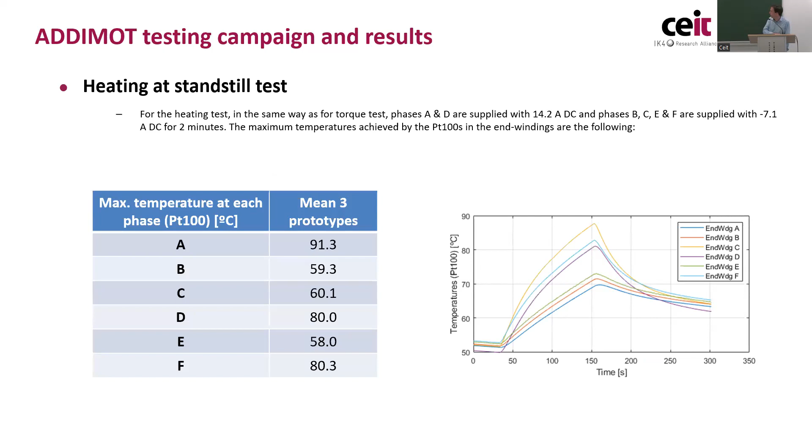Finally, the DC power consumption should be under 150 watts, and we measured this power consumption at the end of the heating test, because it's the worst case where the resistance of the phases, or the windings, are hotter, so the resistance is higher. So the worst case is this point, and we were under the 150 watts of the requirement.

And finally the weight - the requirement of weight was 3 kilograms. We're slightly above, 150 grams above, the motor's target. It is very easy to reduce this weight, but as we have designed these prototypes, it was not possible in this project, though for further improvement of the motor it is quite easy.

The thing is that we segmented the magnets into an 11 millimeter magnet, so we could reduce, for example, from 55 millimeter to 44 millimeter the length of the motor, the active length. But from 44 to 33 millimeter, which is a great reduction of weight, we couldn't do it because the DC consumption was above 150 watts.

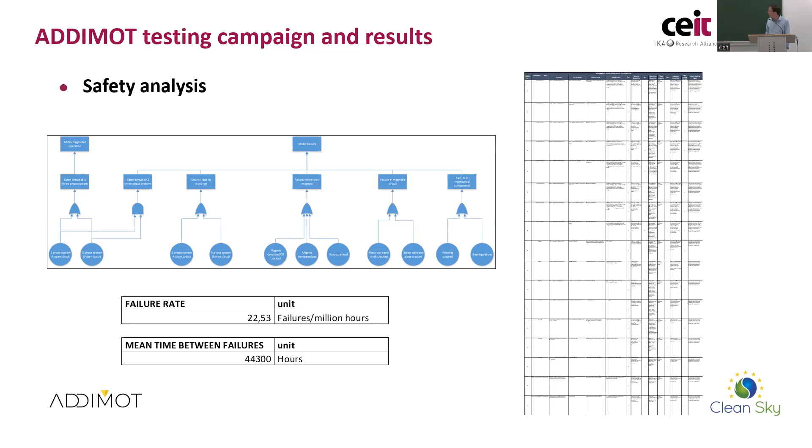And finally, to sum up, it is also a low voltage motor, so the reliability of this kind of actuator is quite good. I would like to stress that our intention is to do further testing of this motor with environmental conditions, like cold and hot conditions, the torque curves versus current, but also dry friction and cogging torque that was not possible due to time constraints.

We are in collaboration with Safran to do these tests out of the project, so it's not easy to find the time and resources, but our intention is to do further testing to see what are the limits of this actuator. In fact, it is very new technology for electric motor, new manufacturing techniques, new materials. So this testing, I think, would be very interesting for us.

And finally, to close this session, I would like to talk about some lessons learned as a brief summary of everything we have here today. The first one is quite obvious: additive manufacturing is valid for magnetic and structural components for electric motors, with some constraints, of course.